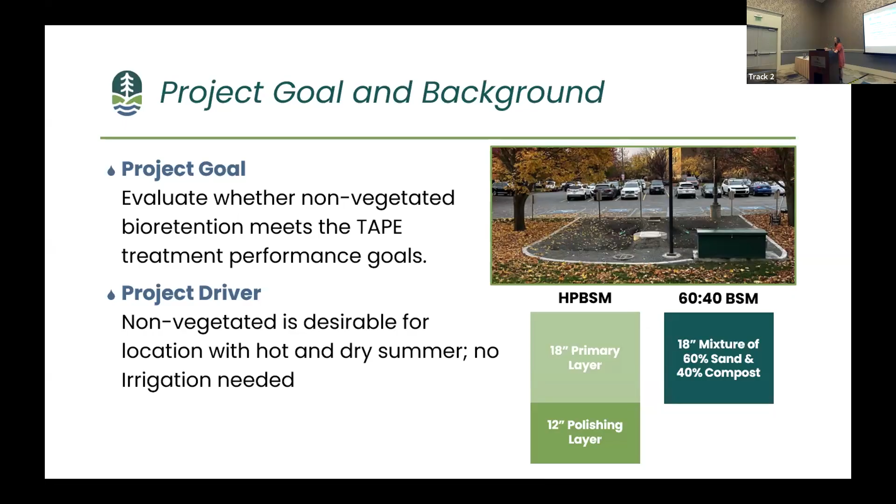Is everybody in here familiar with TAPE? Is anybody not familiar with TAPE? Okay, so we did have this slide just in case you're sitting here and don't know what we're talking about with TAPE. So just real quick, TAPE stands for Technology Assessment Protocol Ecology. And basically it's a set of standards that says this is how you will evaluate the effectiveness of a BMP. And it tells you exactly what you need to do.

It defines things like what is a qualifying storm? And that includes the duration of the rainfall event, the depth of rainfall, when the storm starts and when it ends. It defines those specific conditions. It tells you how many samples you have to collect. So we have to get 15 samples from qualifying rainfall events on this project.

And it also defines the treatment performance criteria. So it says how much each bioretention media needs to reduce of specific pollutants. And so like for TSS, there's an 80% reduction. It provides that specific standard for what's working and meeting the permit requirements.

Back to Mikala. So our project began in November of 2023. This is when contracts were executed. And then our study preparation began in December of 2023 and moved through that next year, December of 2024. We started construction this October and wrapped up construction in December, and then began sampling here in January of 2025. So our data collection will continue through December of 2026, and then we'll begin our reporting phase. And our project is projected to end around June of 2027.

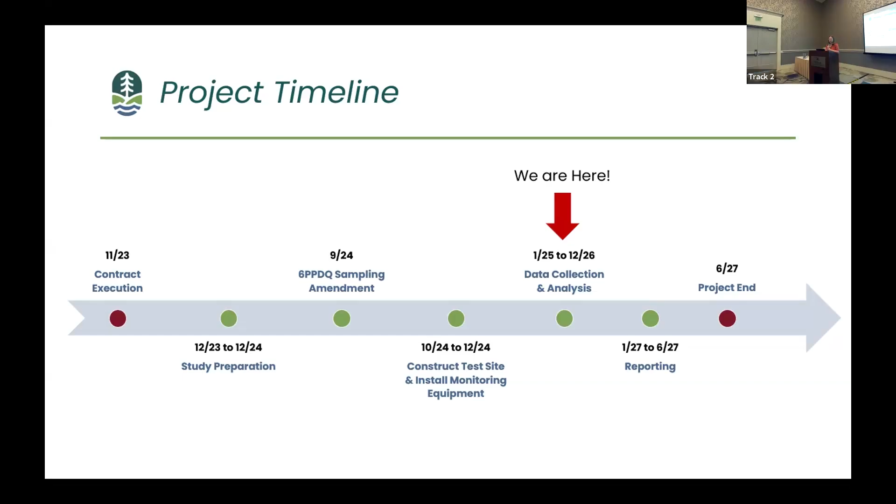Here is our study design and test site location. So we're located on Gonzaga campus, as we mentioned earlier, in Spokane, Washington. Our runoff comes from a parking lot just outside of a soccer field. Our runoff basin is 0.61 acres. Something that's interesting about our test site here in Washington is we get 4 seasons. So we are figuring out the struggles of rain on snow events and what all 4 seasons hold with falling leaves and these blooms that are also happening here in the spring.

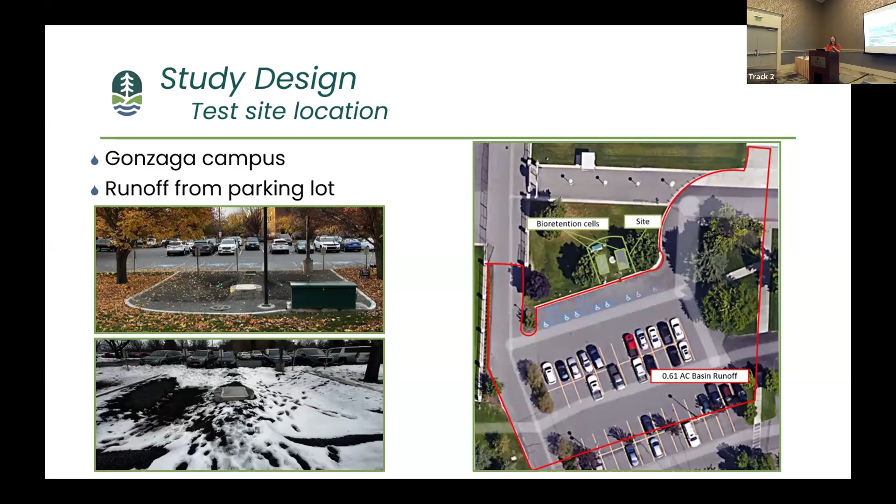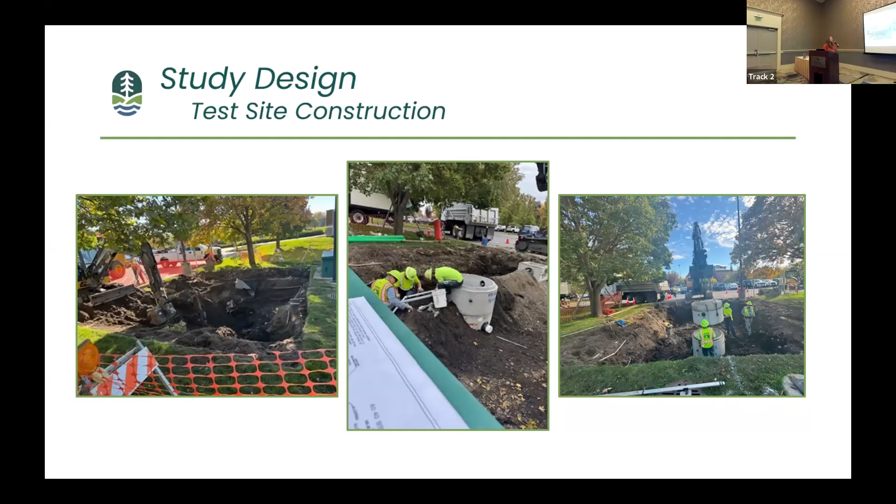Here are our first set of construction photos. This photo here on the left is of day 1. This was that previous test site that was ripped out, the big hole in the ground. And then we constructed our manhole as well as a berm that separates the 2 cells. They're installing a conduit pipe, which is where the sampling tubing runs through that's connected to a set of ISCOs. Then they're stacking the top of that manhole in that last picture there on the right.

Here is a 30 mil HDPE geomembrane liner that they're laying over the entire test site, as well as the perforated pipe that they're laying in both of the cells. The City of Spokane actually created those perf pipes, so I got to watch them cut the individual perforations in the pipe, which was pretty incredible.

The last picture is of them setting the media. The media came in these large bags, some with ties at the bottom that could be ripped open, and then some that needed to be cut open. You can see in this video them releasing the media, and then the digger will shake, and the rest of the media will spread out evenly along the bottom, and then they used rakes to make sure that the elevation was accurate across the floor.

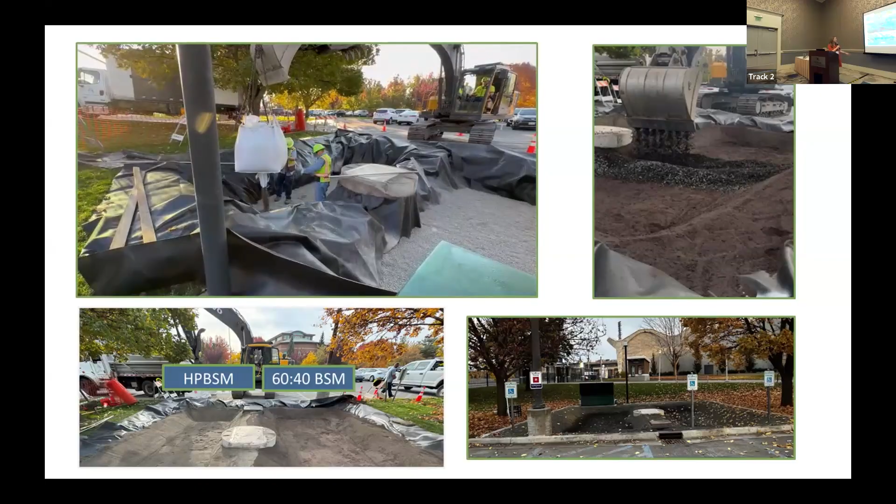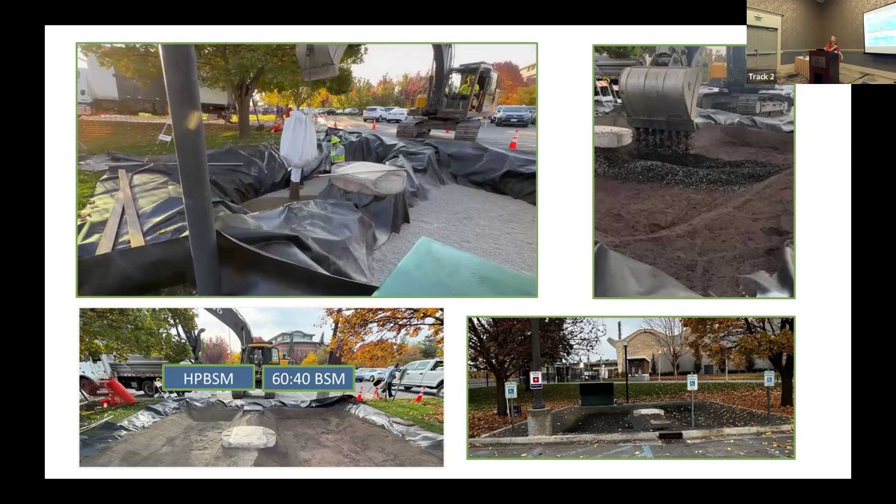This picture here on the bottom left is of both of the medias laid. So this was after they were raked to grade and made sure that they were level across. That high performance biosoil media on the left, and then the 60-40 biosoil media on the right. They were covered in a 3/4 inch basalt rock. This was requested by Gonzaga campus. It matched other rock that covered their gardens around campus.

And then the lower picture on the right is of a completed test site. So we completed it with an edging circling the site and then made the rock go all the way to our monitoring vault.

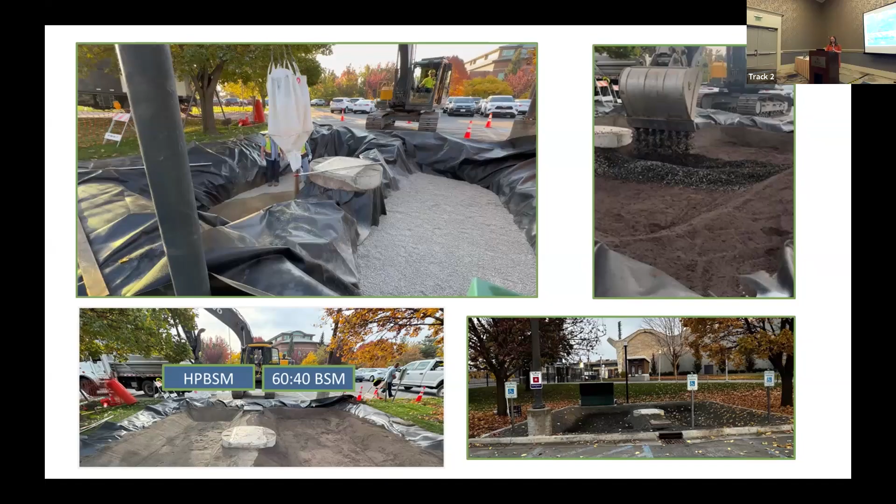So as Aimee mentioned earlier, we're targeting 15 storms to sample. We measure in composite samples, so the ISCOs pull into one large jar, and then we split this jar into varying amounts for sampling, and then the samples are sent to 2 labs, one in Spokane, that is Anatek Labs, and then we ship our 6PPD samples to a lab, Manchester Environmental Lab in Port Orchard.

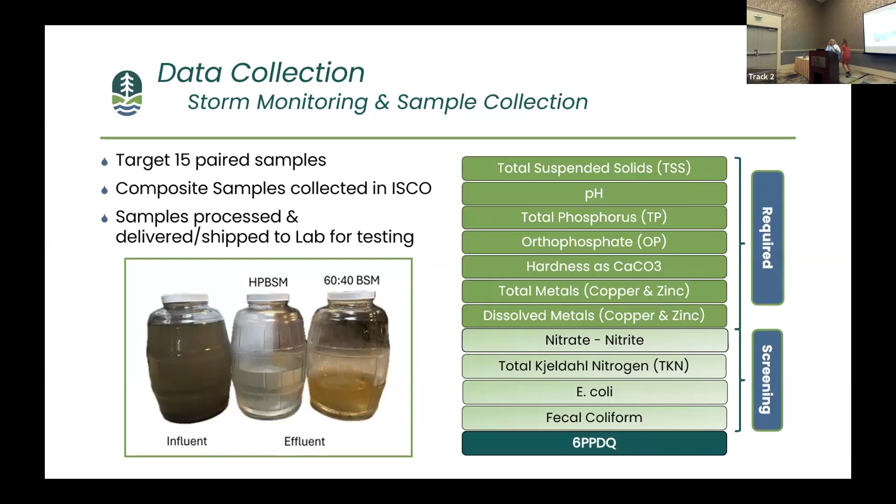So I'm going to walk you through the results, starting with total suspended solids. So we've only had 3 qualifying events since we started in January that we have data back for that we're able to include. We do have 5 for 6PPD. But for the 3 events we've had for total suspended solids, we've had a range of TSS coming in from about 130 down to 35 milligrams per liter, with our median being at 77 milligrams per liter. We've had a really good reduction.

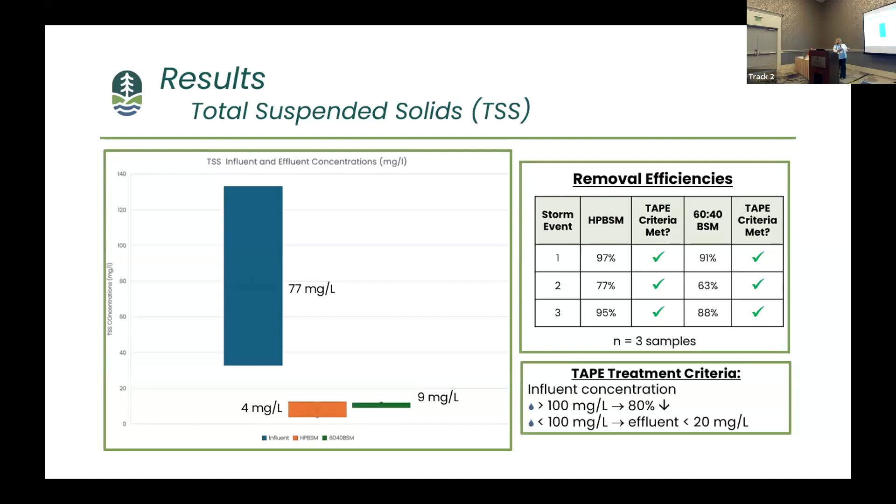TAPE, which is in your bottom right. The criteria for that is if it's over 100 milligrams per liter, our reduction needs to be 80%. And if it's under 100 milligrams per liter, we need to have an effluent concentration of 20 milligrams per liter or less. And for all of the 3 events that we've had, we've either hit the 80% or been below 20 if our influent was below 100 milligrams per liter. So we've had great results with TSS.

I'm going to talk a little bit about pH and hardness. We live in 4 seasons, and then we have some different conditions with snowfall that occurs. So on February 22nd, we had a rain on snow event. It had snowed all month. Gonzaga is very diligent about applying their de-icer 6 times that month between rainstorms and piling their snow up in the parking lot. And we didn't have a ton of snow, but we did have piles of snow that were all over the parking lot. So we had a great source of pollutants everywhere that had piled up.

So we were all over the storm, very excited to get this rain on snow event. We got the data back, and the influent hardness concentration was 2,700 milligrams per liter. To provide context to how high that is, it's typically around 20 for other events when they're not applying de-icer 6 times. So we do have this extreme condition that can occur, and it's magnesium chloride that's coming into these ponds that we wouldn't normally be seeing.

Most of the time with hardness, you actually see a slight increase as it goes through the media, especially the 60/40. For that event, we definitely still saw a decline. The other ones was a slight increase. pH is typically around 7 coming in and just a little above 7 coming out. For that particular event, we don't normally do hardness. That's a new TAPE requirement that we added in.

But for the event where we had 2,700 milligrams of hardness coming in, our effluent pH from the 60/40 was actually just below 6. I was surprised to see that correlation that might be there between the 2. Typically, like I said, it's around 7.

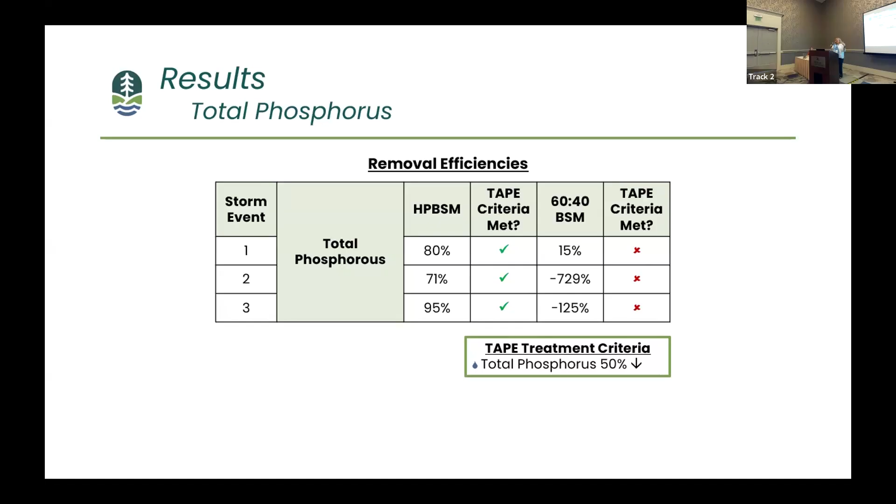We saw that in storm 2 and 3. We did see a reduction in storm 1. That's pretty rare to see. And I suspect that's because we had an influent hardness concentration of 2,700 milligrams per liter, all that magnesium coming in that helped bind and potentially form precipitants that are filtered out easier. But it still didn't meet TAPE. We didn't expect it.

For dissolved metals, looking at dissolved copper and dissolved zinc, TAPE criteria for dissolved copper is a 30% reduction. With the HPBSM, it exceeded well over the 30% and met it. 60-40, it did not. It was leaching copper. Not a surprise. That's been seen in other research that's been done too, that the 60-40 doesn't do a great job with copper. It definitely reduces the toxicity, and we know that from other studies. Just the concentration, we don't see that reduction.

Dissolved zinc, TAPE criteria is a 60% reduction. For the HPBSM, they exceeded that, did fantastic with it. 60-40 didn't quite hit that. In Eastern Washington, we've had a couple bioretention studies, and we haven't quite hit the TAPE criteria for zinc. I'm understanding that's been a little bit better on the west side. I'm not quite sure why that is, but we're not quite hitting it there.

For 6PPD, we have a little more flexibility. We're just trying to get data. That's the goal right now. Let's get 6PPD data, so we're not just focused on is this a qualifying event or not. So we've had some events that don't quite have enough volume to get all the samples, so we've just pulled 6PPD. Our concentrations have ranged from about 250 down to about 40 nanograms per liter, with the median being at 163.

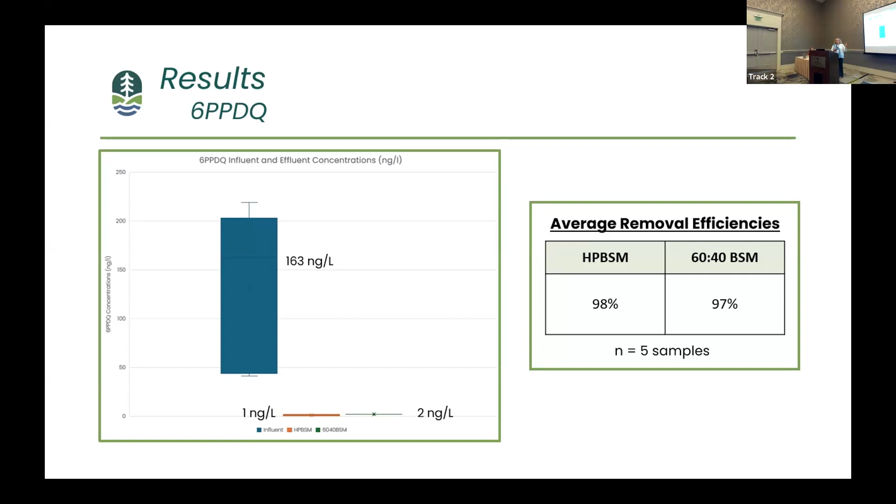We have a high-use parking lot. It's packed during the academic year, a lot of turnovers of vehicles during the day as well. During sporting events, it's packed as well. Both the HPBSM and the 60-40 did fantastic with reducing 6PPD-Q. We had over 98%, 97% for those. So that was really great data. And it's very consistent between all of the storms we've had that we've seen that reduction.

Okay, a little bit about next steps. Next step is recommending maintenance procedures. That is in our scope. How do we handle these non-vegetated BMPs so we don't get sediment buildup, grass that grows on it, and pretty much it's a vegetated rocks mess? When it was installed in the fall of '24, immediately we had the leaf drop, and I'm like, oh, that's going to be such a pain. And then in the spring we had the seed drop, and I thought, oh, I'd rather have the leaf problem. So we'll be developing guidance for this non-vegetated system, as well as trying to prevent plant growth and sediment buildup.

We'll be continuing sampling until December of '26. That's the duration for our project. As soon as we finish, January of '27, the project switches over. We'll have a new senior design team, and we're going to get to stress test the site with de-icer. I'm very excited. We're running 6 storms of stormwater through it, and then another 6 with de-icer, and doing a comparison to understand whether we're getting differences in the data because of the de-icer applied. The final reports will be done in June of '27 for both the TAPE study and the de-icer stress test.

A few lessons learned from the project. One is making sure your chokestone is really washed and free of fines. Below your bioretention media, if you have underdrains, you'll typically apply either a permeable liner, which I don't like to use, or chokestone. We use a 4-inch layer and it works fantastic, but it needs to be free of fines. When they came out to construct the site and dumped the pea gravel in, I know what it was spec'd to be. It wasn't free of fines. They had to dig it all back out.

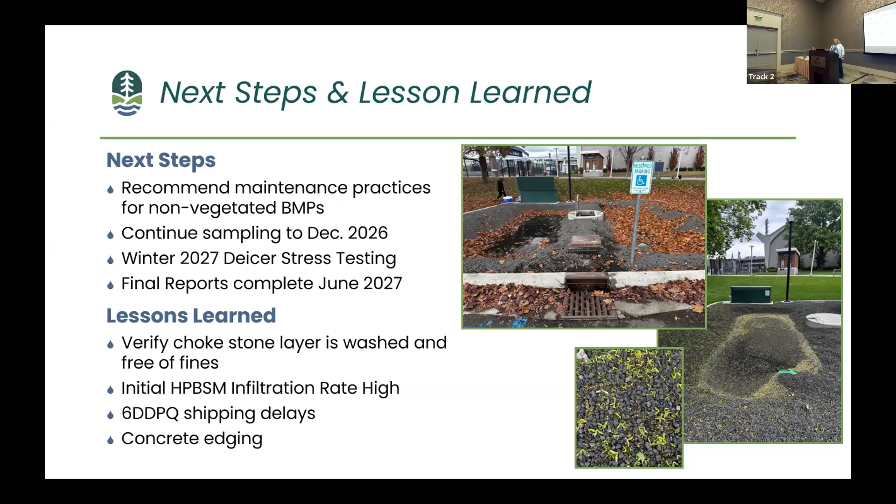It looks beautiful. But if you do have a site where you've got rock next to grass, and you're worried about that, the concrete berm has been fantastic. So, and that is all.

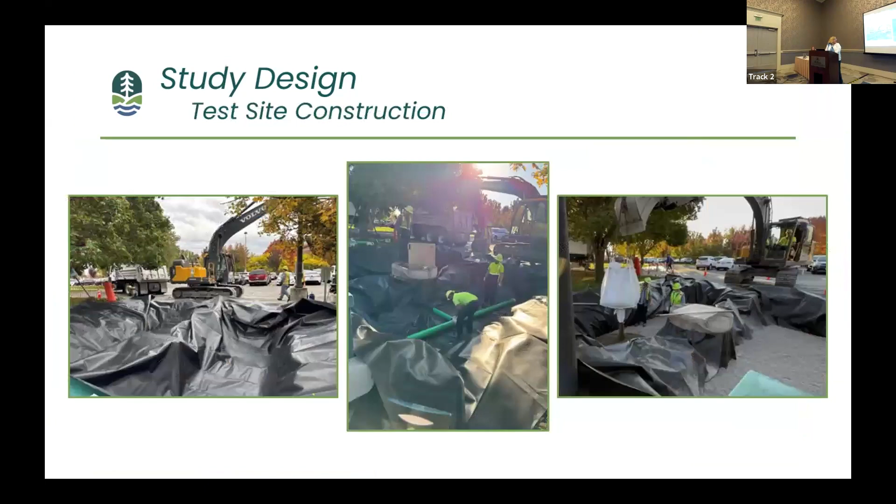And then it still functions as that, but there's a full berm around our site. You can kind of see it in this middle picture here. Right here, you can see the berm. So we just get the runoff from the parking lot, and the runoff that comes in from roof drains is outside that area and doesn't mix with it.

It was over 35 inches per hour for that first one. I guess I wasn't expecting that. I did contact Dylan. I'm like, what in the heck is going on here? It was insane to watch too, because the one pond is ponded and the other one is like quicksand. It was insane. And so we were on the phone trying to figure out what was going on. So yeah, anyway, Dylan.

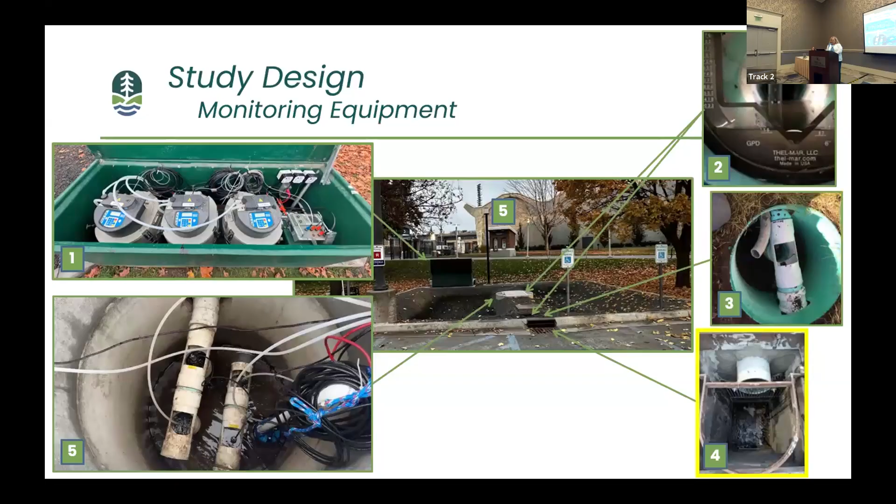Not really. I was expecting to see that, because these are in order on that one, although I don't think I have the data. We'd have to go through it. We have seen it in the past, again, that was one event. I guess I don't have all of those in here.

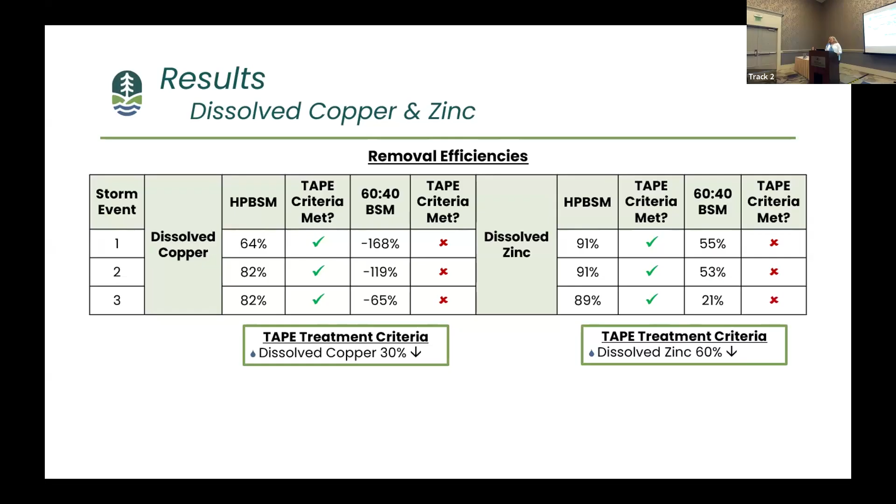No, we do have a rack set up in the front that helps to prevent that. We do sometimes have problems, but we go out and try to clean that out beforehand. In the fall, there's so many leaves, I can only clean so much, but we haven't had a problem with the bypass at all.